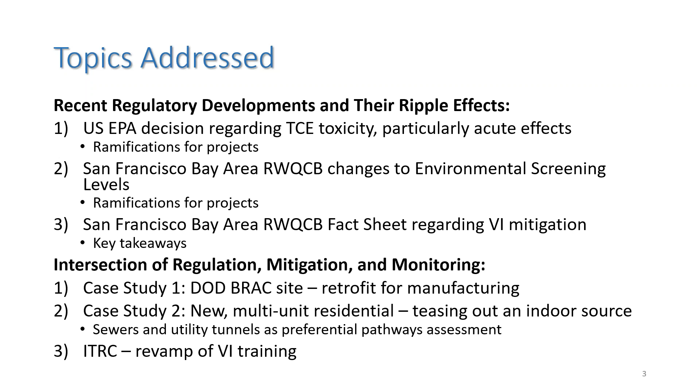So in terms of topics addressed, I'll just do a hopefully quick run through some recent changes in federal regulation, and then a couple that apply specifically to the San Francisco Bay Area. And I'll do that fairly quickly because I want to focus most of my time on the two case studies, and then hopefully end up on a looking forward note. So

this is now going back to 2014, so it's not that recent, but it's definitely affecting projects that we're currently working on, and that is back in July of 2014, US EPA came out with their accelerated response action levels and urgent response action levels, specifically for TCE in indoor air from subsurface vapor intrusion. And the idea here is that the accelerated response action needs to be taken if TCE levels are detected at predetermined levels, and those actions need to be done within a few weeks type of time frame.

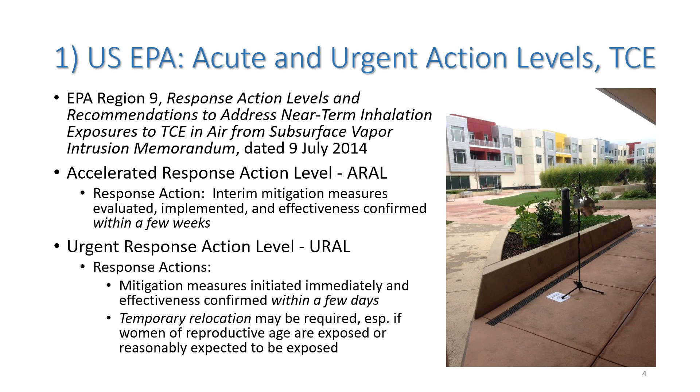Whereas if the concentrations are higher and reach the urgent response action level, the response needs to occur literally within a few days. And furthermore, temporary relocation might be required, especially for women of reproductive age that have been exposed or might reasonably be expected to be exposed.

So here are the numbers. The ARAL is based on a hazard quotient of 1, URAL hazard quotient of 3. And here you see it's broken down between residential and commercial land uses, and a slight variation between 8-hour and 10-hour exposures.

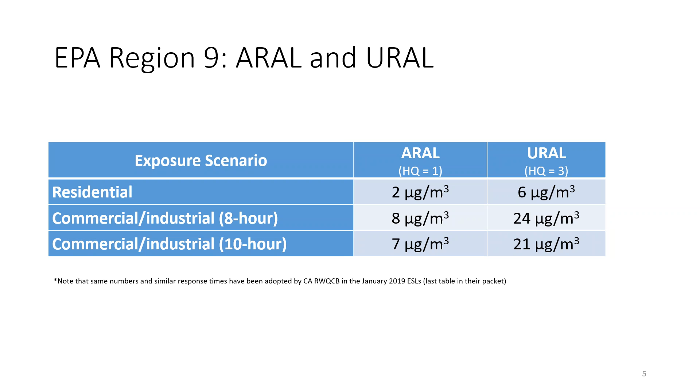So what does that mean? Here's an example. This is a project where Langan was retained to provide both environmental consulting services and vapor intrusion mitigation system design. And I'll talk about this in one of the case studies in more detail, but this is a project where RetroCoat was preemptively applied just so that the client could get access to the space and begin their operations.

But on the topic of this regulatory change, the URAL and ARAL had to be addressed in the monitoring plans, and it specifically requires that employees be notified that they might be subject to temporary relocation if monitoring data indicates that TCE is ever detected at those levels.

Also, in the early indoor air monitoring, it was revealed that one of the pieces of equipment actually uses some PCE. So the client was reminded that they need to install and maintain the filters so that the PCE would remain below detectable levels. And from an employee exposure standpoint, the monitoring plan is for nearly continuous indoor air monitoring for the foreseeable future to be able to protect their employees from the URAL or ARAL exposures.

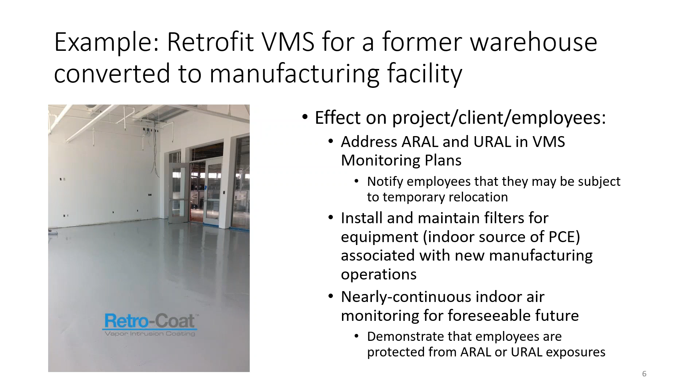The second regulatory update I wanted to touch on was one that just came about in January of this year. This was something that everyone had been anticipating for quite some time, but nobody knew about the exact timing of it until it actually was issued. And this was a revision to the environmental screening levels that the San Francisco Bay Regional Water Quality Control Board basically regulates on. And the driver for this change was that they wanted to use empirical attenuation factors instead of the ones that had been previously determined using the Johnson and Ettinger vapor intrusion model.

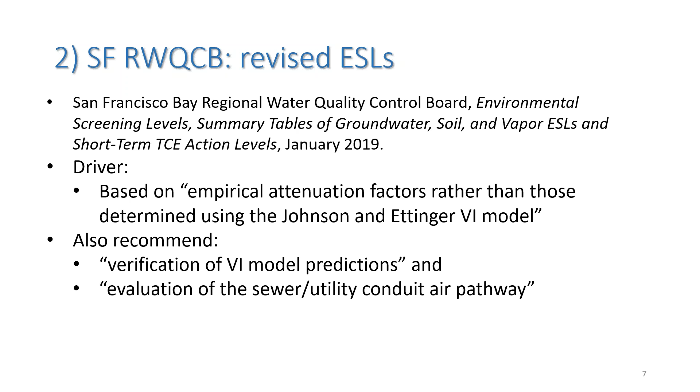And they also had some additional suggestions, such as verification of model predictions, and also to not forget to evaluate the sewer or utility as a potential conduit to indoor air.

And here are some of the numbers. This is just an extremely abbreviated list. The list goes on for multiple pages, but just to give you an idea of the change from 2016 to 2019, if you compare the numbers, what you see is that the screening levels have dropped by 1 to as many as 3 orders of magnitude, and furthermore, additional compounds have been included in the list.

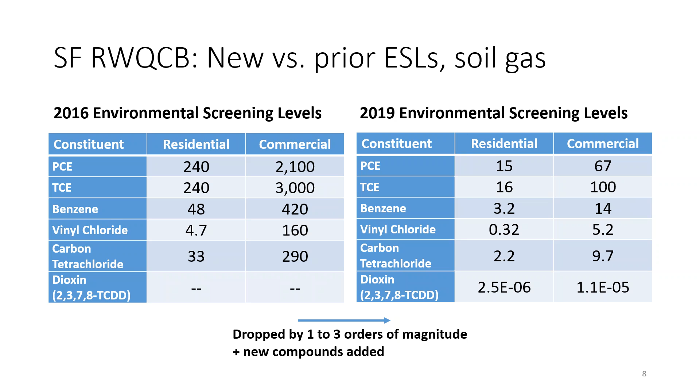And in practice, what strikes some people that perhaps practice outside of the state of California as unusual is that here the environmental screening levels are in effect action levels. An exceedance of 1 or more of the soil gas ESLs essentially means that vapor intrusion mitigation is required unless a site-specific health risk assessment is prepared.

And what that means for our clients is that sites that prior to January of 2019 might have been okay now require mitigation because they're considered impacted. Furthermore, with the change in the screening levels, there are cases where additional COCs are identified.

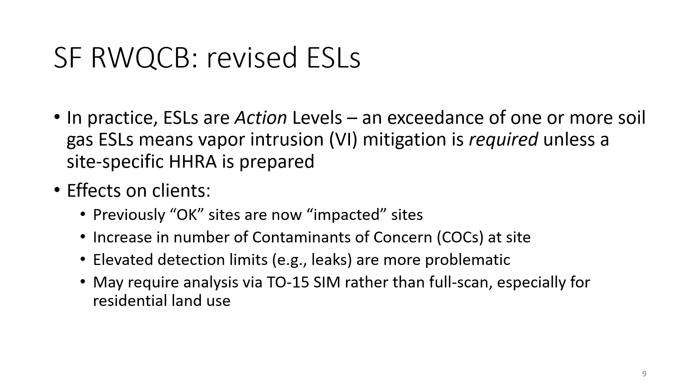Also, from a practical standpoint, for people collecting the samples in the field, greater care needs to be taken to avoid leaks because leak compound detections can elevate detection limits, which then renders your data difficult to use or useless. And also, because of the lower screening levels, TO-15 SIM might need to be used just to get the data that's needed to verify compliance with these ESLs.

And here's an example of what that means. This is a rehab of a public housing project in San Francisco. This is an example where soil gas data previously would have been okay, but as of January 2019, all of a sudden our client had an impacted site that required vapor intrusion mitigation.

So Langan was retained specifically for the vapor intrusion mitigation task. And essentially we submitted to the regulator a proposal whereby VI mitigation would be done just with an application of, in this case, RetroCoat.

These are existing buildings where trying to install a ventilation system underneath the slab is very, very cost prohibitive. But our calculations, we believe, show that a membrane-only approach will be fully protective of future occupants. And as a bit of an aside, some pre-mitigation indoor air sampling has already been conducted in a small handful of

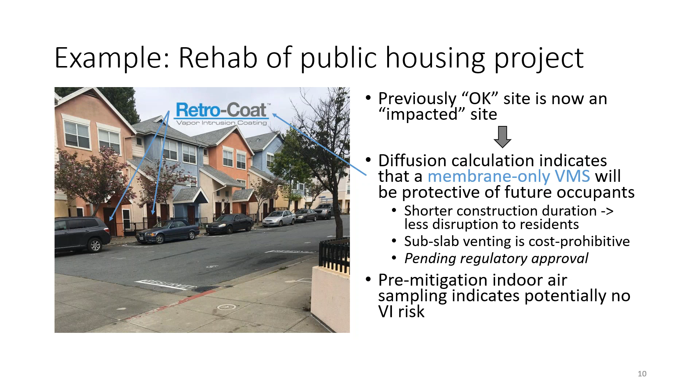units, and it looks like our existing vapor intrusion risk, even with no mitigation, is very low and possibly non-existent, but more sampling will be done to verify that as this project moves forward. And we are waiting for regulatory approval of our approach.

Here's another quick example. This is a project in Oakland where, again, our client previously had an okay site, but suddenly in January of this year, they now find out that they need to actually install a vapor intrusion mitigation system. So here, Langan was retained to provide that service, the engineering design of a vapor intrusion mitigation system, which in this case will be a passive venting and membrane approach.

And the impact on our client is, they did not have in their project budgets this type of a system, so they're looking at an incremental cost that's not insignificant for engineering design, for regulatory oversight, site visits, et cetera, and of course the actual construction of the venting and membrane system.

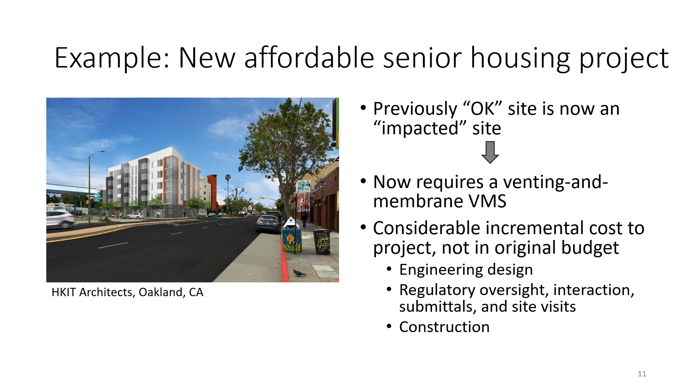And the third item I'll touch on is an even more recent development. This came out in just July of this year, which is the Water Board's fact sheet regarding development on properties with a potential vapor intrusion threat. And I won't go through each of the key takeaways there. They all make good sense. Vapor mitigation is not a substitute for remediation. We see that across multiple agencies, that the vapor intrusion mitigation happens either in parallel with or after remediation

has been implemented. There is a greater preference for subslab depressurization systems for specifically slab on grade design, and I'll talk about that more in the next few slides. Another item is that the Water Board really wants to have oversight over these projects for the duration of the cleanup.

And that has some real cost implications where in the past, perhaps folks thought, well, in maybe 3 to 5 years, we can demonstrate through sampling that everything is fine, and we can sunset the monitoring program. But that is really no longer the case. People need to think about that, if the cleanup is going to take 30 years, then monitoring is going to need to occur in some way, at least for the next 30 years, which then leads to the financial assurance requirements.

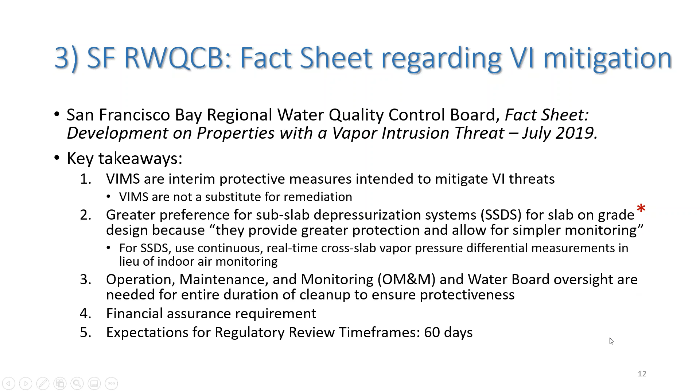So those that have practiced here know that essentially subslab depressurization systems are technically impracticable where you have these types of site conditions. For example, if you're developing on top of a landfill or an old fill site that has a layer of refuse, or compressible soils. Here in the San Francisco Bay Area, we have clay layers that are known as bay mud or old bay mud that are highly compressible. We have liquefiable soils. We also have uncompacted fill.

For example, the 1906 earthquake in San Francisco was quite devastating, and after that, a lot of the rubble, the debris, was just simply brought to the edge of the bay and dumped into the bay. And then, of course, there are also areas that have very shallow groundwater tables, as little as 2 to 5 feet below the ground surface. So if you have any of these types of conditions, an SSDS is just not going to work, certainly not

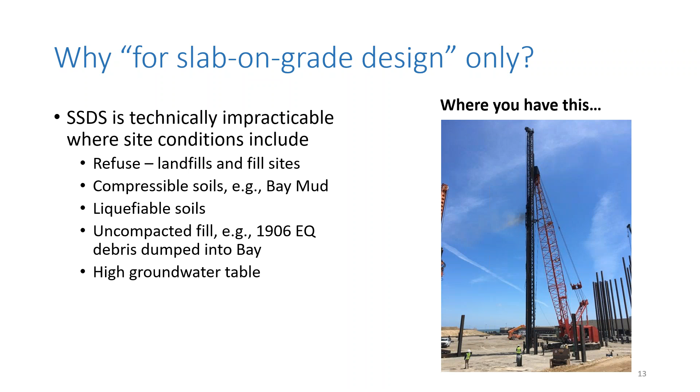in the long term. The photo on the right is a project we're currently working on. It's a commercial development on top of a closed landfill. And the next couple slides kind of show you what happens at some point down the road.

This is a slide, I know this might be difficult to sort of focus in on, but the upper arrow points to a subslab spray applied membrane that's doing a fairly good job of adhering to the underside of that structural slab. And in the 10 years or so since this project was built on earthquake fill, you can see there's about 3, 4 or more inches of settlement that's occurred.

But what's occurred there is, due to the settlement, there were some shortcomings in the construction of the utilities, and a contractor was brought in to essentially tunnel underneath this building and effect the utility repairs. So that gave us an opportunity to also go underneath this building and take a look at how our venting system has stood up over time and has dealt with the settlement issues.

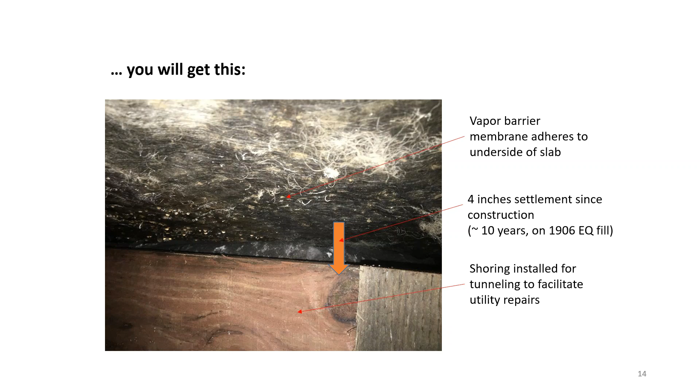And a more extreme example is this one. This was not a Langan design. This was a much older design, some 30 years ago, on a former landfill. And here we're looking at 4 feet or more of settlement since original construction. And here Langan was brought in really to provide geotechnical services, because the piles were losing their capacity because they were no longer surrounded by soil but by air.

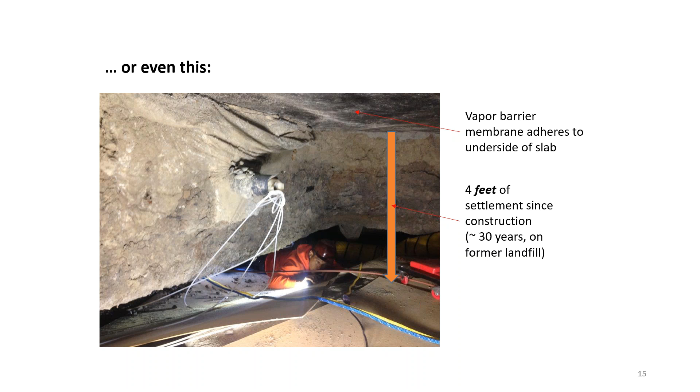So eventually these void spaces were filled in with lightweight fill. But again, it gave us an opportunity to go in and look at how this particular system was performing, and we made some retrofits to that system as well. But yeah, in these conditions, subslab depressurization is just not feasible. So that's why in the Bay Area, certainly where we have a lot of pile supported structures, we'll continue to essentially not really look at SSDS very frequently.

So next I wanted to go into a couple of case studies that look at vapor intrusion and that nexus between regulation, mitigation, and monitoring. So here's an example where we have a warehouse that was built on a former naval base back in the 40s. And the warehouse itself and other areas were identified as sources of contamination in the groundwater. And we had a client who came to us who wanted to lease one of these buildings, this warehouse known as Building 360, for the purpose of converting it to a manufacturing space.

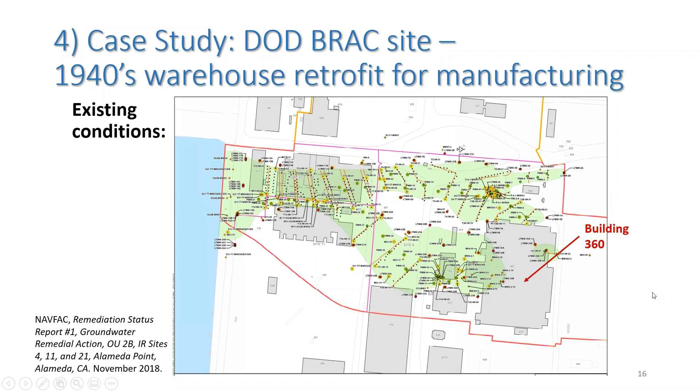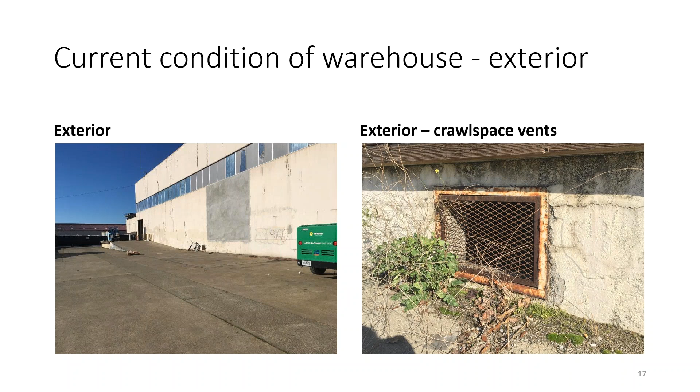But stepping inside for a moment, at the beginning, the warehouse had been more or less cleaned out, but there was some additional cleanup that needed to occur before our client could really occupy the space. And also the pictures to the right show what that crawl space looked like. There too, the warehouse was built on piles, and because it's sitting on bay muds and other compressible soils, there's been some additional settlement that's occurred. As you can see, the piles are kind of hanging in the air there. You also notice there's ponded water there.

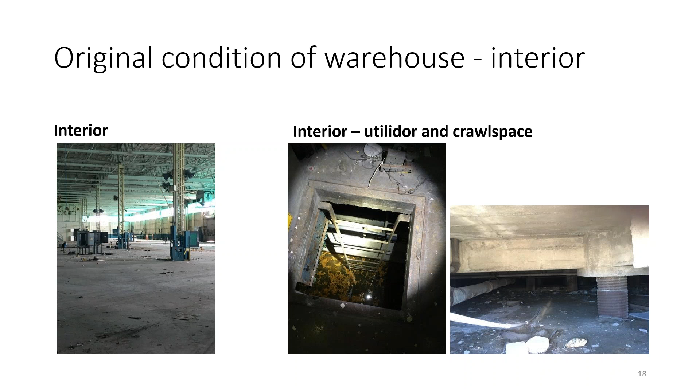The groundwater here is extremely shallow, as little as 2 feet below the ground surface. So there's ponded water, not just below the slab, but also in these utilidors. Those had to be pumped out in order to get access to them. So you can imagine the challenges with trying to sample the space, and you can appreciate the technical and practicality of trying to convert this into a depressurization system as well.

So fast forward a little bit. The approach that we took here was we felt confident that the future occupants of the building would be fully protected with a membrane-only system. Here again, we suggested that Retrocoat be used, and also the client identified a movable wall product, kind of a curtain wall, manufactured by Shaver Industries that can basically be moved down the warehouse as the client expands their operations. But our client was really wanting to get into the space very quickly. So what they chose to do was essentially preemptively mitigate against vapor intrusion so that they could occupy the building and begin manufacturing operations.

Ultimately, we've collected by now multiple rounds of data, which seems to indicate that there's little or no vapor intrusion risk. And just to focus in on a couple of things, if you look at the 1,1-DCA results, the screening levels are presented at the bottom in the blue boxes. So for indoor air, the ESL is 7.7 micrograms per cubic meter. For soil gas, it's 260. And you can see in the bold and the subgrade, we did have some exceedances of the 260 screening level. So we were in the 400s and the 500s.

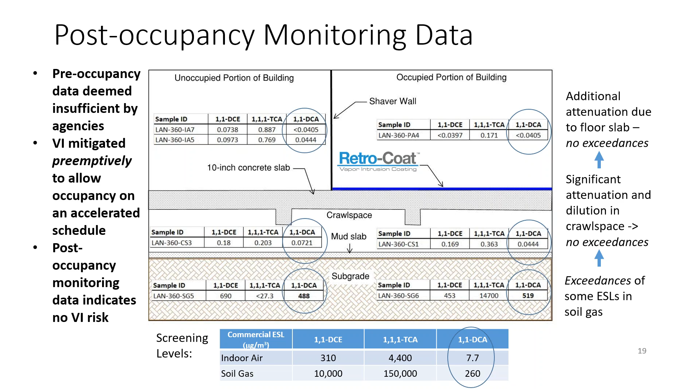So now going to a second case study. This is a project we've been working on for some time. It's located in Palo Alto, California. And the environmental consultant performed a soil gas investigation looking specifically for chlorinated solvents because the site sits on a regional plume that dates back to manufacturing activities going all the way back to the 1950s, in which chlorinated solvents were used.

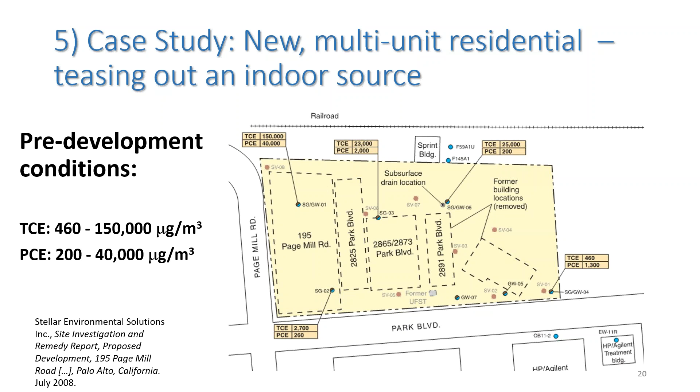And sure enough, in the soil gas investigation, they found PCE and TCE up into the 5 and 6 figures. So Langan was retained to design a vapor intrusion mitigation system for this new development. And the approach that we took was your fairly standard spray applied subslab membrane with a passive venting system.

And over the last 3+ years, we've collected upwards of 400 samples plus a handful of sorbent samples. And from very early on, we were fairly confident that we actually had an indoor source of PCE. We did, though, take a look at the sanitary sewer as a potential contributor to what we were seeing in indoor air. And through a fairly diligent round of sampling of pretty much everything we could collect a sample from, we ultimately ruled out this as a contributor.

And before and after, what we've been doing is our client has been installing RetroCoat in selected areas of the building in the basement. So starting back in July of 2017, RetroCoat was applied at the basement level of all 4 stairwells, and then later, more recently, in 2 of the elevator pits, and most recently in 1 of the trash rooms.

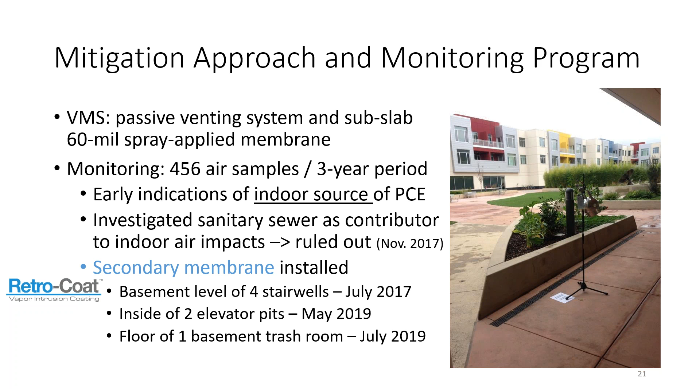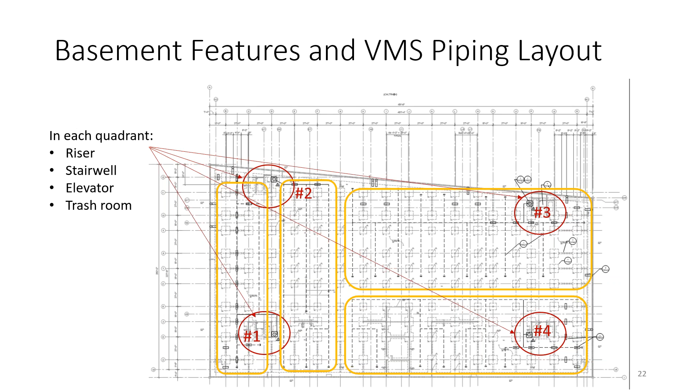And just to give you an idea of what that all looks like, here's the plan sheet of our piping system layout, and just wanted to point out that the piping system leads to 4 different risers. Loosely speaking, we've got 4 quadrants there, and in each of the 4 corners of the building, you have a stairwell, an elevator, and a trash room. And the stairwell and the elevator are frequently thought of as potential preferential pathways for vapor intrusion. What caught us by surprise here, which is the real lesson learned, is the importance of the trash room.

But before we get to that, just a little more background, we were monitoring PCE and TCE concentrations in the risers, which are, we believe, generally indicative of what's happening immediately beneath the slab. And we can see it took about a year for conditions to stabilize, but since about April of 2017, PCE and TCE concentrations in the subslab have been very, very similar, certainly similar in terms of orders of magnitude.

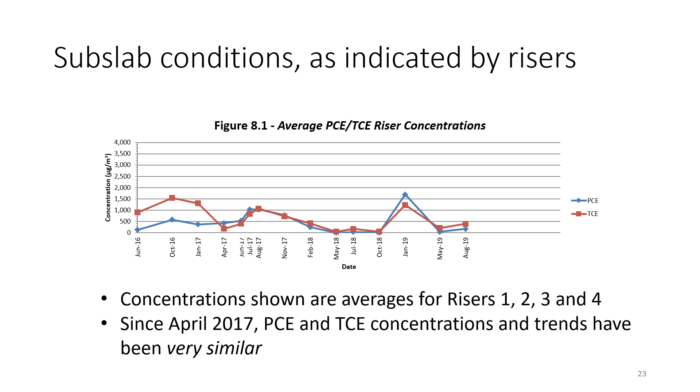So to us, this looks a lot like there's not exactly a connection between what we see in indoor air and what we see under the slab. Not only do the PCE and TCE concentrations not track what's happening under the slab, they also don't track each other.

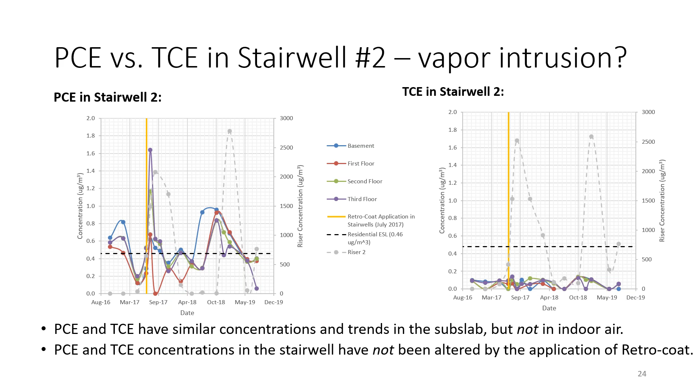And lastly, this yellow line marks the date where RetroCoat was applied at the basement level in all 4 stairwells. And I think it's fairly obvious that application of RetroCoat hasn't really affected the data. And to us, that means that we are not looking at a vapor intrusion condition. There's something else going on, and we're quite sure that it's an indoor source.

Similar type of data for the hallways. So the hallways are up on the second and third floors. Again, there's a disconnect between what you see under the slab and what you see in indoor air in terms of TCE versus PCE concentrations. And again, here, the concentrations in the hallways have not been affected by the application of RetroCoat back in the stairwells back in 2017.

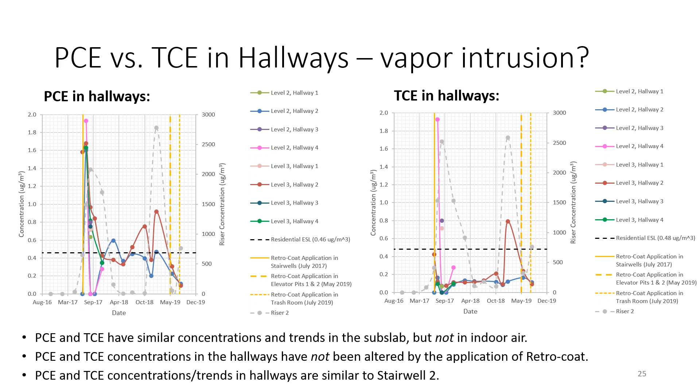More recently, RetroCoat's been applied in the elevator pits, and you might think, oh, that's helped bring down the concentrations, but we had the presence of mind a couple of years ago to actually start looking at what's happening in the trash rooms. And if you look at the architectural drawing in the corners, you can see there's a trash room, and there's a very small dashed circle that actually is a trash chute.

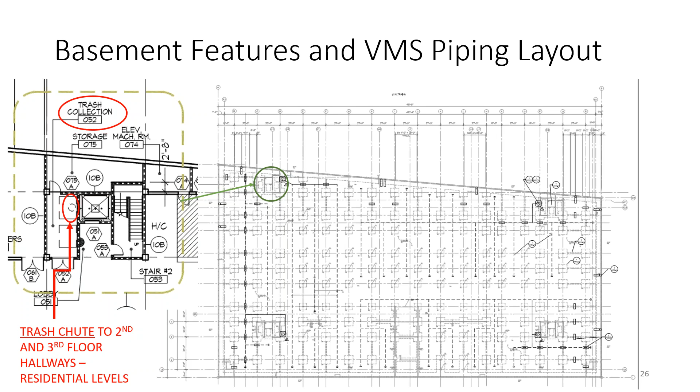And when we detected these first initial results, we had a conversation with the building ownership and building management, and they took further measures to restrict tenant access to the actual trash rooms. What it looked like was that it was kind of an open secret among tenants that those doors could just be pushed in even though they were locked, and tenants were dumping all kinds of stuff into those dumpsters.

And it would appear that one of those tenants is doing something. We don't know who it is, we don't know what they're doing, but they are using PCE or some type of a product that contains PCE. So we're continuing to chase this down, but it seems like hardening the trash room doors has caused this tenant to, if not quite cease and desist, at least reduce their activities and reduce their dumping.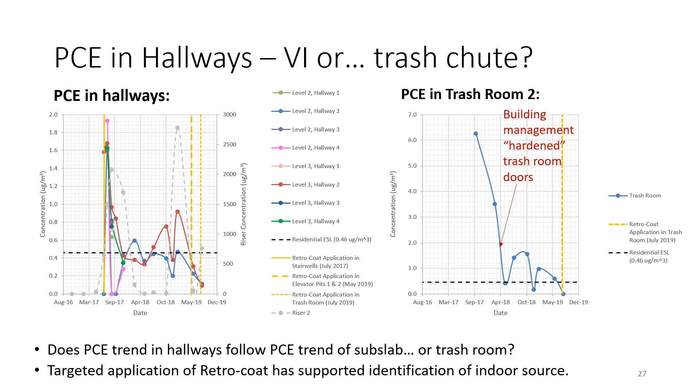So here, coming back to RetroCoat, I think that the application of RetroCoat has been helpful in that it hasn't affected what we see in indoor air, but it has definitely helped us to really make the case that what we're looking at is not a vapor intrusion problem, but an indoor source.

So just to touch very briefly on sewers and utility tunnels, I had mentioned earlier that for this particular project, and this one photo was taken out on the street in front of that building, we did do a fairly extensive investigation of the sewers as a potential contributor to what we were seeing in indoor air, and we did ultimately rule that out.

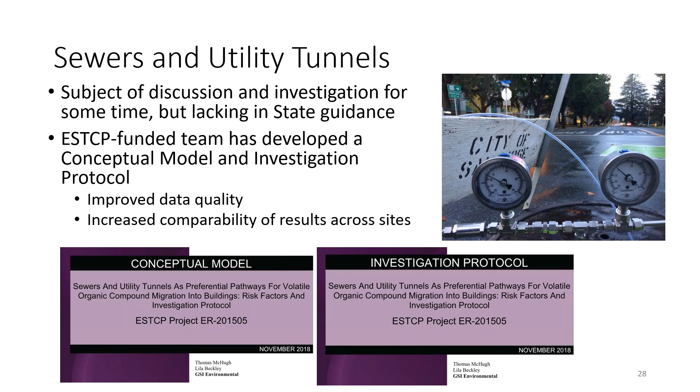But for those that are needing to undertake this type of an investigation, for those that are not familiar, there's a DoD-funded program, SERDP and ESTCP. And one of their teams has developed a conceptual model and an investigation protocol for these types of investigations. We would have been happy if we had had this available to us when we tried to do this, but for those that are needing it, this is available now.

And lastly, I wanted to mention another research effort, this one under ITRC, the Interstate Technology and Regulatory Council, which essentially supports state environmental regulators. There were a couple of vapor intrusion guidance documents that came out in the past. 2007 was the VI guidance, which was followed in 2014 by the petroleum vapor intrusion guidance. And both of those guidance documents had training programs associated with them. This is very typical for how ITRC works. Guidance documents are then followed with training programs.

And currently there's a team which I'm a member of who's tasked with creating a new vapor intrusion training program and any supplemental documents that we might feel are helpful. And the goal of this revamp is to assist end users, generally thought of as regulators, but certainly the consulting community as well, with determining appropriate vapor intrusion controls for specific sites or situations, identifying performance and closure strategies, and ultimately to assist them in evaluating vapor intrusion submittals.

And for the moment, the team is focused on 3 broad areas. And the one that kind of sets the stage is the site conceptual model, or conceptual site model. People use different phrases. But what we wanted to do is narrow that down to vapor intrusion and really identify those factors that need to be understood in order to develop an effective vapor intrusion mitigation strategy.

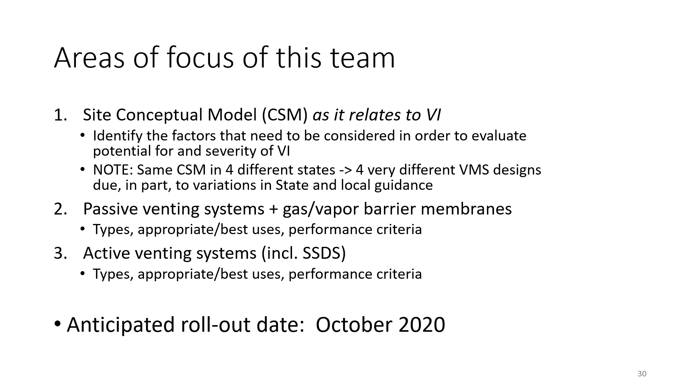And then the team is also going to look at passive venting systems, different membrane products, and also active venting systems, including subslab depressurization systems. So you can look for that to come out hopefully in October of next year. That's our target deadline.

So just to wrap up in terms of trends, I think what you see is an increasing recognition among regulators, consultants, and certainly our clients that vapor intrusion continues to be a very complex field with a lot of confounding factors and a lot of intricacies. I've just named a few preferential pathways. Just think back to the trash chute: who would have thought that a trash chute was a preferential pathway, but it certainly can be.

Then the special challenges posed by rehabbing, retrofitting existing structures, for example, the warehouse case study that I touched on. And then the myriad of potential indoor sources, be it benzene emitted by forklifts during construction, PCE from manufacturing equipment even today, and then random residents in a residential multi-unit structure. Who knows what people might do.

And then, typical of urban areas, we have confounding factors, just general air pollution. Benzene has long been known to be one of those contaminants that's ubiquitous. There are others, certainly. And then I already touched on sewers and utilities.

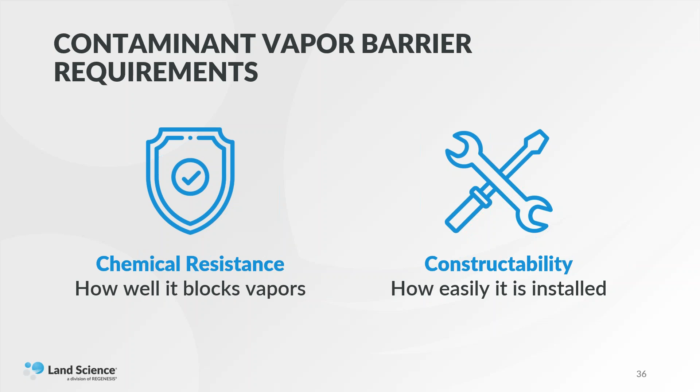So just a quick note here. When we talk about contaminant vapor barriers, they're often evaluated by two primary criteria. Chemical resistance is the ability to block vapors, and then constructability, which measures ease of installation and, more importantly, the quality of the installation. It is the combination of these two factors that often determines which barrier is selected. There is a third criterion, not shown, but always considered in barrier selection: cost. It goes without saying that all the barriers we will discuss today are priced competitively within the marketplace. Our focus is going to be on chemical resistance and constructability.

And I'll get to that slide in just a moment. We did have a technical issue, so I'm going to go back one for us, Dane.

So I mentioned earlier that technology innovation is at the core of who we are as a company. The following is just a general timeline for the development of passive mitigation barriers. Beginning in the early 2000s, the marketplace saw the entry of spray-applied asphalt emulsions. These systems evolved from the waterproofing industry and methane mitigation barriers, which were widely applied in certain markets like the methane zone in Southern California. These early rubberized spray-applied asphalt systems provided relatively high constructability, but low chemical resistance against the primary contaminants most of us deal with at environmental sites. Petroleum hydrocarbons like benzene and chlorinated solvents like TCE were often absorbed into these latex barriers, and chemical resistance testing generally wasn't available. Since REGENESIS was not from the waterproofing industry, we recognized immediately that these modified asphalt barriers would likely not meet regulatory standards.

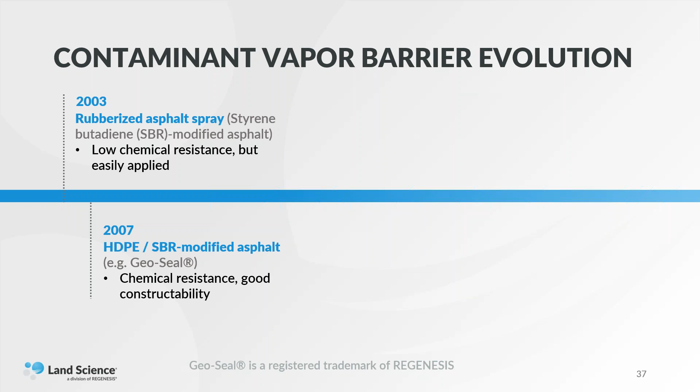In 2007, Land Science brought the industry GeoSeal, the first composite vapor barrier. This was adapted from the waterproofing industry by our scientists as an advancement over the simple spray-applied products being promoted as contaminant vapor barriers at the time. Over the past decade, Land Science has committed significant resources to developing new materials and technologies to increase the cost effectiveness and, more importantly, the chemical resistance of our barrier systems. Since 2015, we've led an internal R&D process to develop new approaches. Simply put, we weren't satisfied with the success of our original GeoSeal system and knew it was time to improve. Folks within our team like Hugh Wen and Kristen Thorson, our full R&D team, were instrumental in developing a new nitrile core material. This represents a major improvement over SBR-type asphalt latex emulsions by protecting against permeance of organic contaminants.

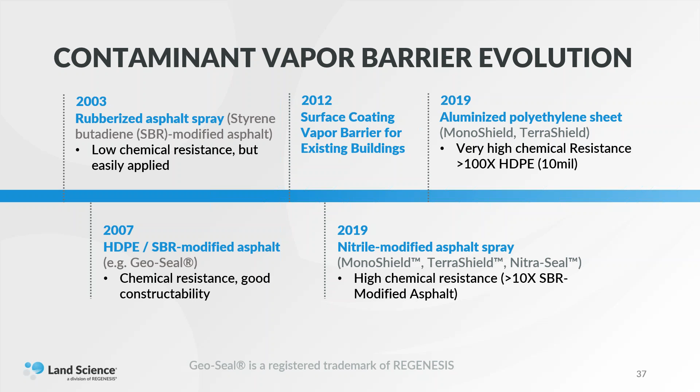So we talked a little bit about chemical resistance a moment ago. I'm going to get to constructability as well. Constructability: you can have the most chemically resistant barrier out there, but if it's too rigid, difficult to install, if it uses tapes at the seams or the penetrations or the perimeter terminations, or if it doesn't use certified installers, you're very likely to have challenges in installing that quality vapor barrier.

Land Science prides itself on our systems representing the highest in chemical resistance. We're proud to announce that we have 3 new vapor barrier technologies in the market. Today we're going to focus on TerraShield, but I do want to introduce these quickly. TerraShield is the most chemically resistant vapor barrier on the market today. This new barrier incorporates dual layers of aluminum combined with an innovative nitrile spray applied core. It offers maximum protection for construction projects while maintaining excellent constructability.

Nitra-Seal provides all the constructability of our original GeoSeal system, but is updated with a nitrile spray applied core, offering 10 times greater protection against vapor intrusion than traditional spray applied systems.

And then finally, MonoShield. MonoShield is specifically designed for preemptive mitigation sites that have historically used thin mil plastic sheets with taped seams or rigid HDPE with heat welded seams. MonoShield is a rapidly applied single ply aluminum nitrile system that's an excellent solution for those preemptive sites, say large warehouses, where people have traditionally used thin mil plastic sheets or heat welded HDPE systems.

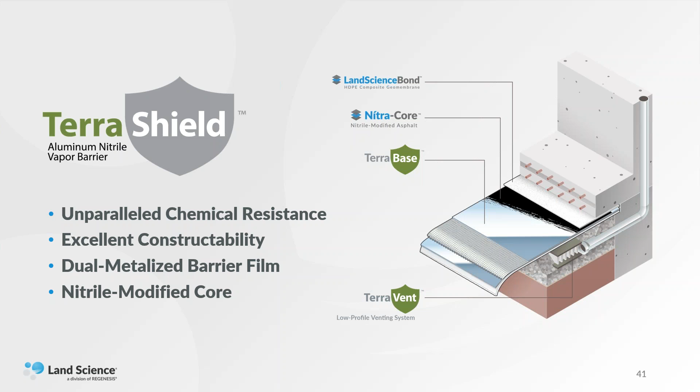So TerraShield is specifically designed for brownfield redevelopment sites where VOCs are present. I do want to get into some of the chemical resistance testing. Here at Land Science, we talk about chemical resistance a lot because it's so critical to developing true vapor intrusion solutions. Chemical resistance really matters when we're protecting human health. In the development of TerraShield, extensive studies have been performed to understand the relative chemical resistance of TerraShield compared to other systems in the marketplace. So we're going to go through the testing that's been done.

First, we compared our TerraBase, which is our dual metallized film at the base of the composite system, against 10 mil HDPE. The purpose of this test was to evaluate the relative chemical resistance between our new TerraBase and older HDPE base layers. The second portion of that test was to compare our new nitrile core to the older typical styrene butadiene modified asphalt core. A simple way to think about this is the innovation between nitrile gloves and latex gloves. Our nitrile core provides greater chemical resistance to contaminants and greater puncture resistance.

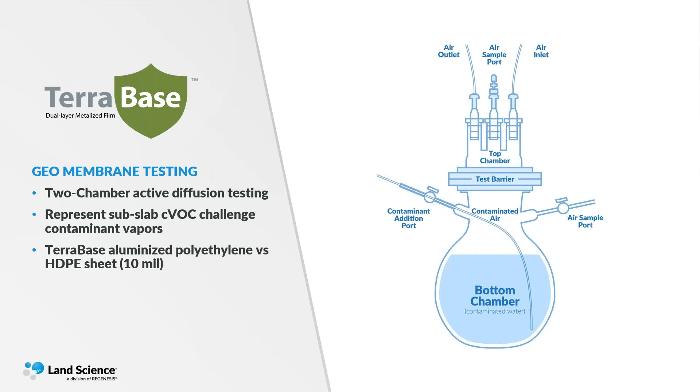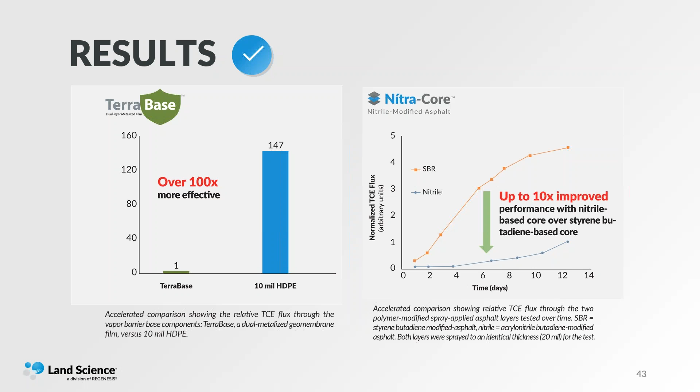With 100 times greater chemical resistance of TerraBase combined with 10 times greater chemical resistance of our new nitrile-based core, we believe it represents a significant improvement over any vapor intrusion barrier available in the market today.

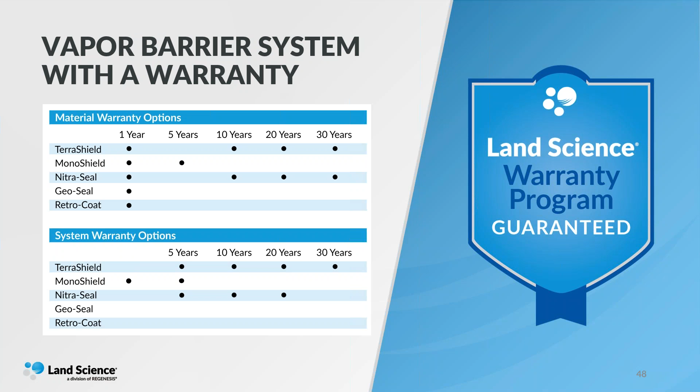So a very quick overview of some of our new technologies, including TerraShield and Nitra-Seal and MonoShield.